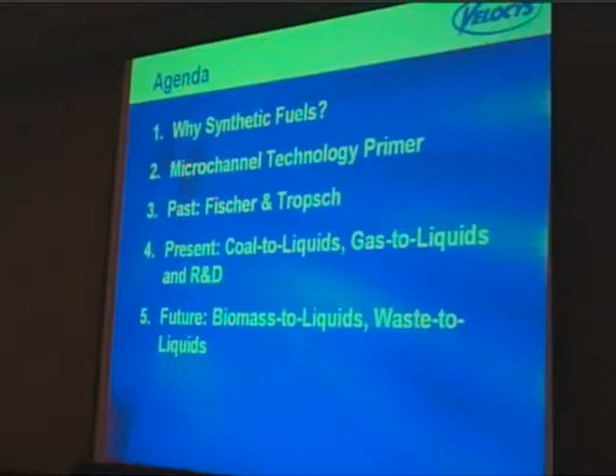What I'm going to talk about: I'll do a little bit of background that probably most of you are very familiar with anyway. Why are we working on synthetic fuels? What's the importance there? And then we'll talk a little bit about microchannels. Microchannel technology is our particular approach to a variety of chemical processes, including synthetic fuel production.

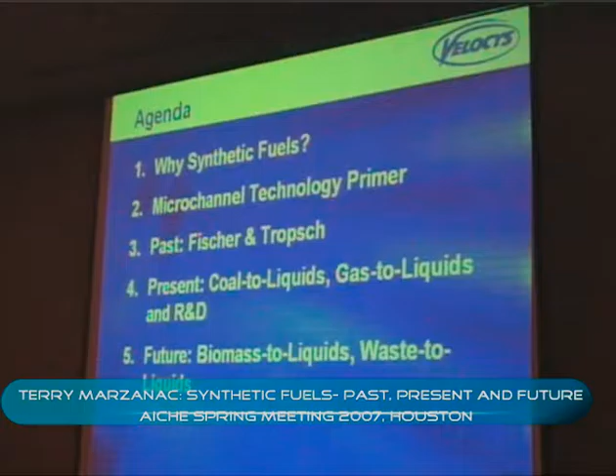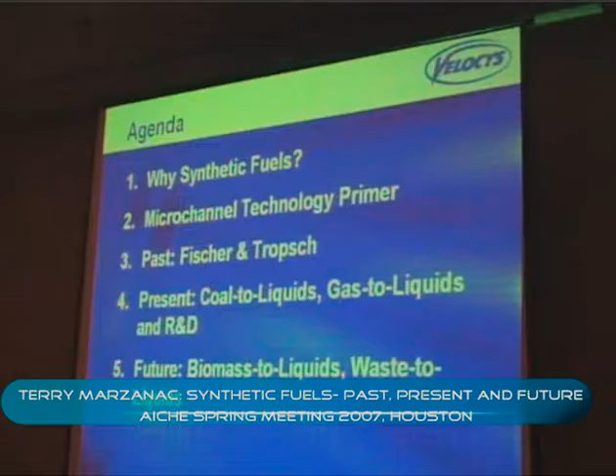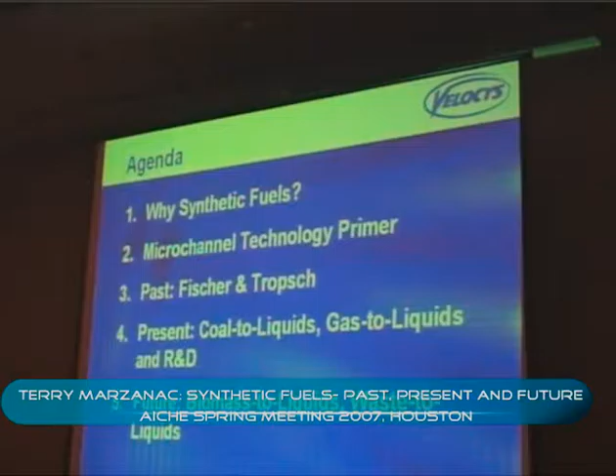Then we'll talk a little bit about the past, which you're probably fairly familiar with, where Fischer-Tropsch chemistry came from. And then we'll talk about what's going on today. The other speakers have done a very fine job, a much better job than I could do, telling you what's going on in coal to liquids and gas to liquids R&D. And then we'll talk about the future, about various conversion technologies, but particularly about our technology and how we see it fitting into the future of synthetic fuels.

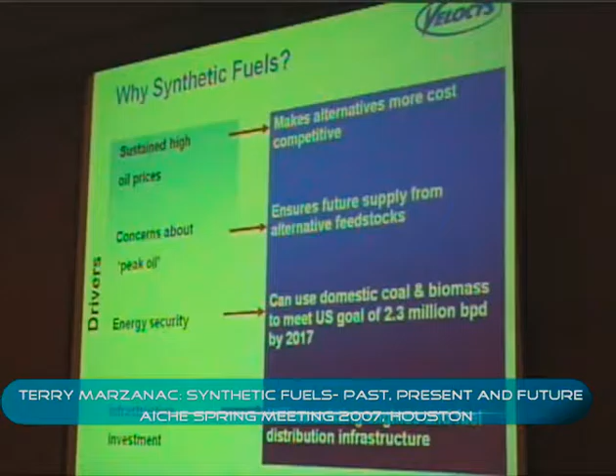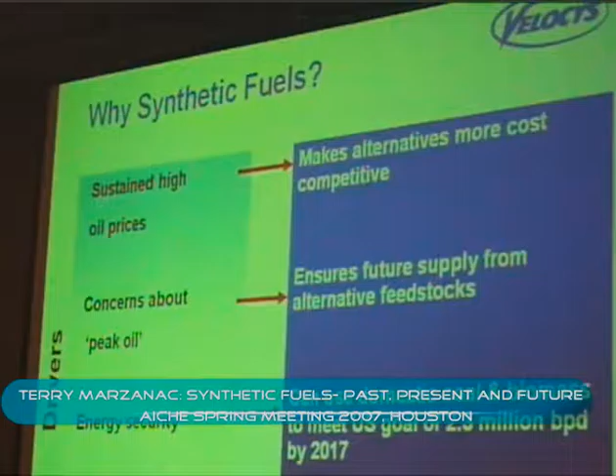Synthetic fuels - why are people interested in them? I think you all know this: high oil prices. Oil prices go up and down. Many of you remember in the late 1990s when oil prices were $10 a barrel. Well, that's not true anymore - oil prices have gone up. The important thing is it's predicted that oil prices will stay relatively high for quite some time. I think we heard one of our speakers today say they would stay between $59 and $100 a barrel for the next 20 years, and that's probably a fairly good estimate.

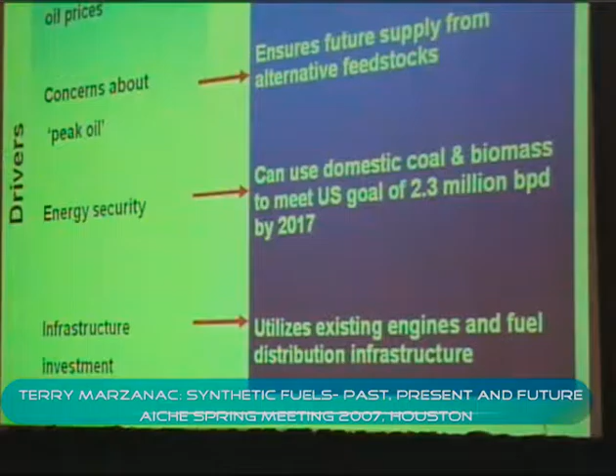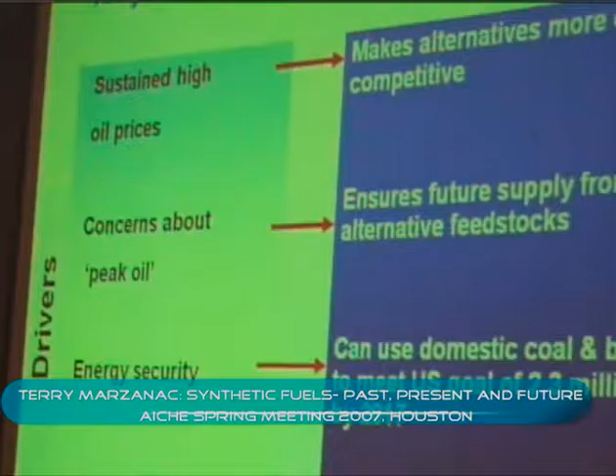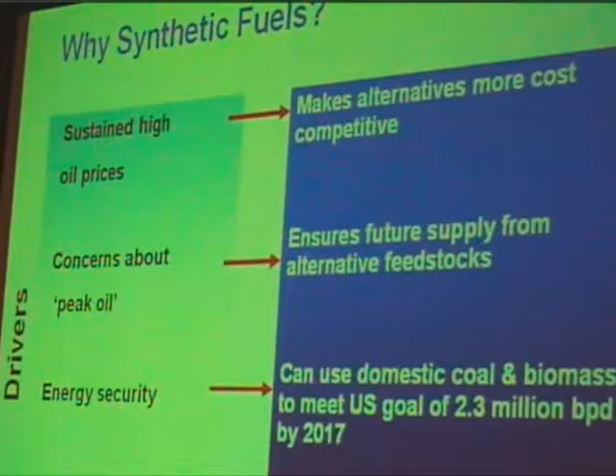Another thing is a concern about peak oil. That is, in the U.S. at least, the oil fields we have - for example, the North Slope and other places - have really gone past their prime and are declining. And so we're looking to have energy sources within the U.S. that are potentially longer term and can reach out further into the future.

Energy security - about 60% of U.S. fuel is imported, as everyone knows, a lot of it from the Middle East and elsewhere. But we could use domestic coal and biomass to meet our goal. The goal in the U.S. is to produce about 2.3 million barrels per day by 2017.

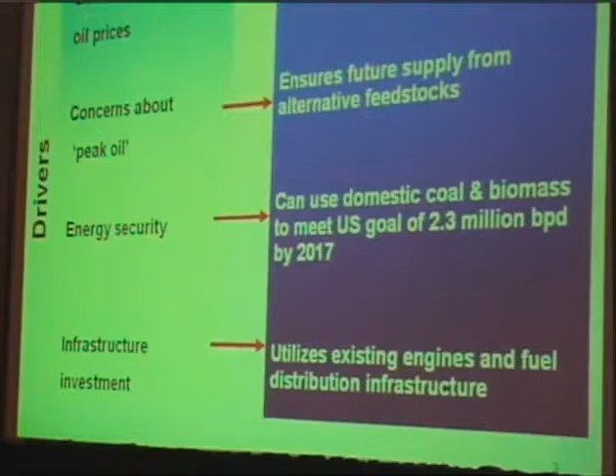I think this was announced by Congress, as one of the targets for synthetic fuels. Infrastructure: in order to utilize the current infrastructure, it would be best to use fuels that are compatible with it. So diesel fuel, gasoline, etc. obviously fit that bill better than some of the other fuels people are thinking about.

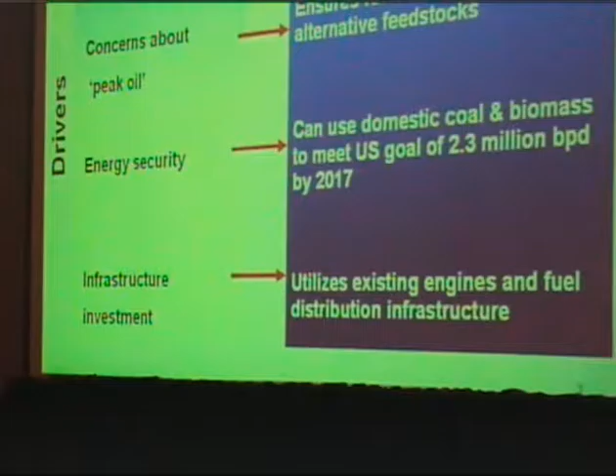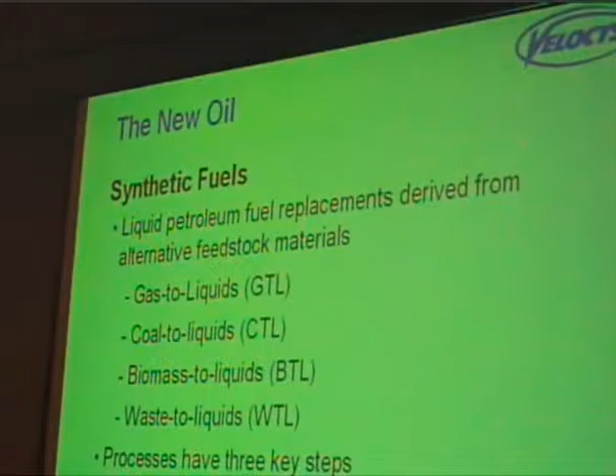What are these synthetic fuels? Where do they come from? These are replacements for oil, or actually additives to oil in some cases, as the previous speaker mentioned, and others. They can be derived from gas, natural gas - gas to liquids - which has been studied quite a bit. You heard about Shell, you heard about Sasol, you heard about others.

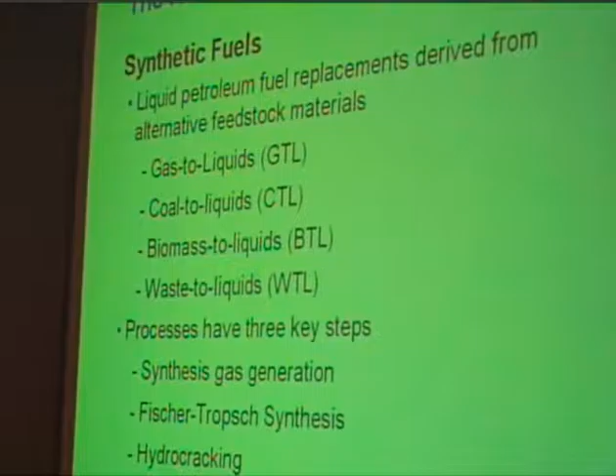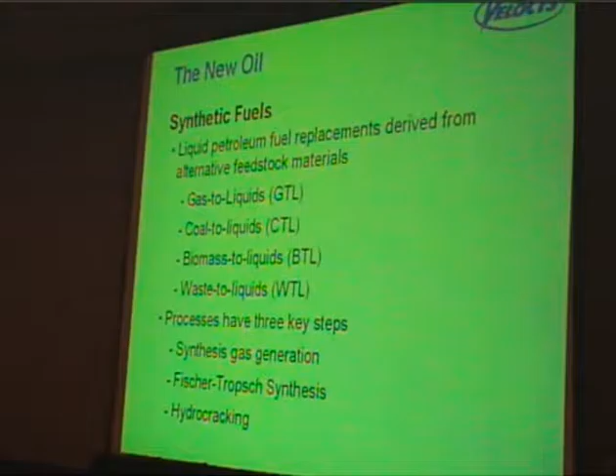Coal to liquids - again, this is something where the United States has a very large supply of coal that could last us hundreds of years into the future. And several other countries around the world, in particular China and Russia, have large deposits of coal that could also help supply fuel out into the future.

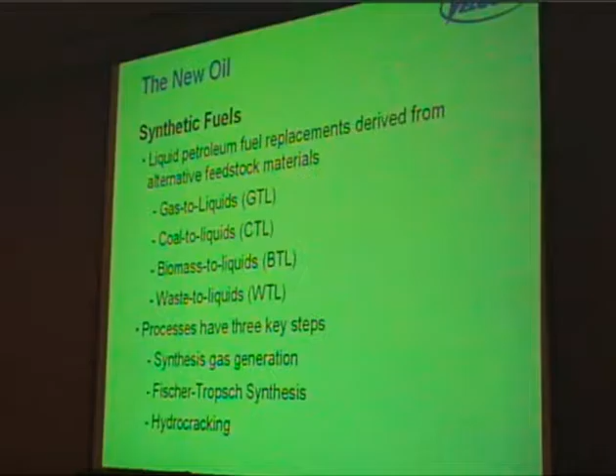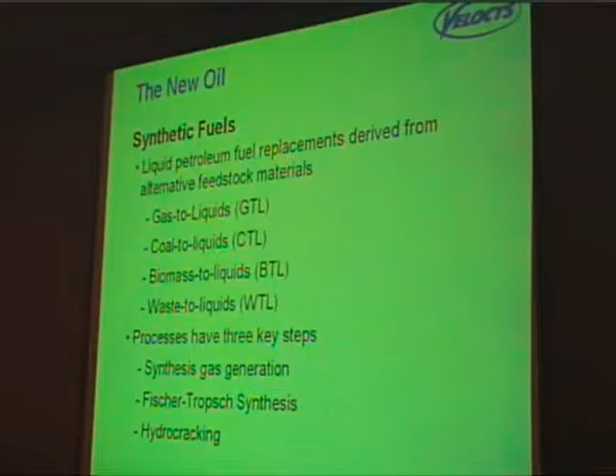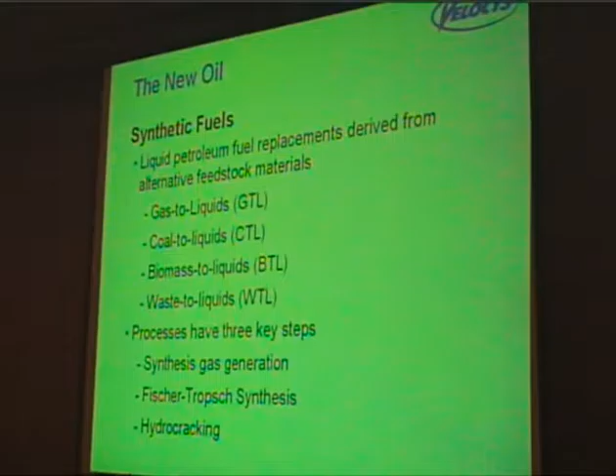Biomass to liquids - this is kind of the hot area currently, certainly in the political spectrum, because it impacts a very large number of regions of the U.S., and a lot of different companies imagine they could be players in this. This is certainly a source of energy that could be tapped and could add significantly to the fuel in the future. And then waste products - this has been attempted in several places where they use municipal waste, and it's still a possibility. There are probably certain niches where each of these technologies, each of these routes, will be useful.

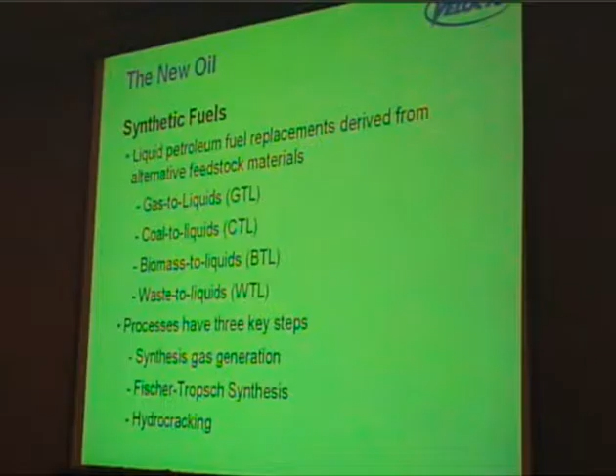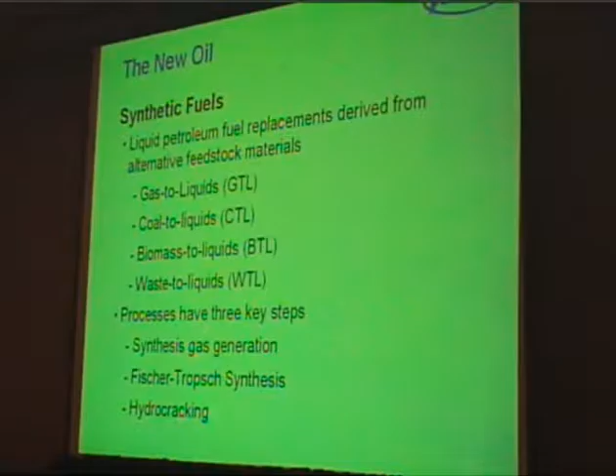Most of these processes have 3 steps. The first step is a syngas generation step, followed by Fischer-Tropsch, although some people have other options for that, and then a hydrocracking step to get the appropriate product - again, as our previous speaker did a nice job of defining what that product should be for a particular application.

Let me talk now about microchannel technology. This is our approach to doing a variety of chemical processes, but in particular today I'm going to talk about how we apply it to Fischer-Tropsch and a little bit about natural gas.

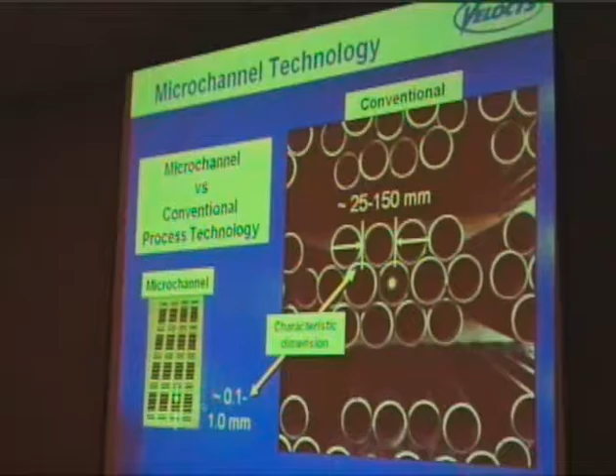What are microchannels? They are very narrow grooves or slots in a metal device that allow you to get a variety of advantages compared to conventional technology.

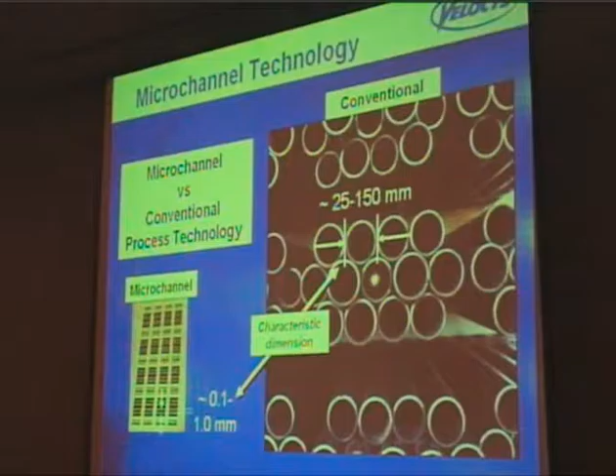You're all familiar with how conventional reactors are operated: fairly large tubes, or in some cases slurries, gigantic structures with fluid flowing through them that can be packed with catalyst. These are typically a few inches to maybe as much as 6 or 8 inches across. The limiting feature of the chemistry in these tubes is how fast you can get things to the surface of the tube, in particular heat in and out.

Most of these processes are very exothermic or very endothermic, and so the distance from the center of that tube, which is going to be the hottest or coldest spot, to the wall is really very important.

In microchannel technology, the typical dimensions for our microchannels—this is a cross-section of a small device we were operating in the laboratory—shows you a variety of different types of microchannels. The typical dimensions are on the order of 1 millimeter or less in terms of the shortest distance from one wall to another. That's what we call the gap.

The reason that's important is that the distance from the center of the channel to the wall is the longest distance a molecule has to travel to touch the wall, for example to meet up with a catalyst if it's a coated catalyst, or for heat to transfer from that fluid to the wall or into the fluid, depending on what process you're in. This is a typical cross-section of a microchannel reactor.

The microchannels run into the screen here, and they can be anywhere from a few inches to several feet long in reactors that we've studied. So the major improvement is increase in heat and mass transport in these reactors.